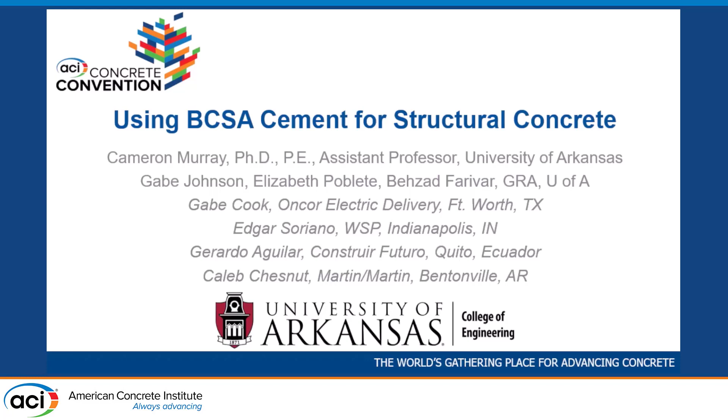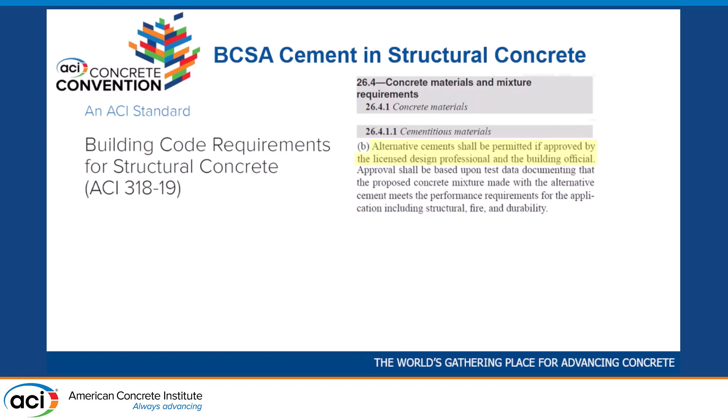I thought I would start with the ACI code, which governs how we design concrete structures. In the 2019 version of this code, there were a bunch of changes. One relevant to this session is that they added language about using alternative cements in structures. It says alternative cements shall be permitted if approved by the licensed design professional and the building official, with some wishy-washy language about exactly how you'd decide if the alternative cement is suitable for structures.

Fortunately, there's a good article published in Concrete International around the same time that's kind of a supplement to the code. It discusses specific factors for structures: axial strengths, compressive strengths, flexural strengths, shear and torsion, ultimate stress-strain relationships, volume change, and modulus of elasticity. It also covers fire and durability, but I'll focus on the structural stuff today.

In our lab at Arkansas, we've addressed several of these things, and I'll talk about some of that today.

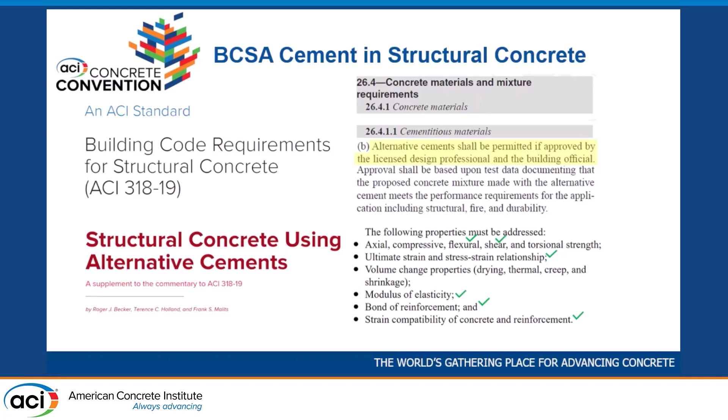This begs the question, why would we want to use this cement in a structure? I would never argue it should completely replace Portland cement, but there are certain applications where it may be a suitable replacement, like precast, pre-stress, and structural repairs, because those utilize its special properties like low shrinkage, fast setting, and fast strength gain.

But obviously there are a lot of practical questions around whether the properties are similar to Portland cement. My introduction to this was as a graduate student at the University of Oklahoma, where I was fortunate to help out with a couple of projects looking at pre-stressed concrete using BCSA cement.

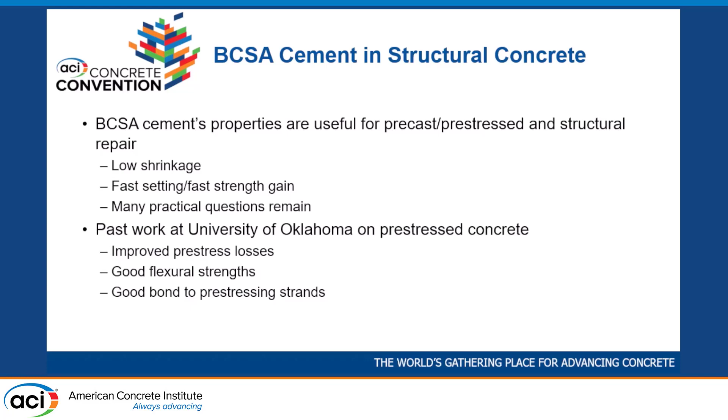On the left, we partnered with a local precaster and made structural-scale precast concrete elements pre-stressed with BCSA cement as a feasibility study. On the right, we did a lab study looking at bond between strand and concrete, and flexural strengths.

We found that the cement had improved pre-stress losses compared to Portland cement, primarily because of its low shrinkage, along with good flexural strengths and good bond with strands. This encouraged me to continue down this path of looking at this cement for structural applications.

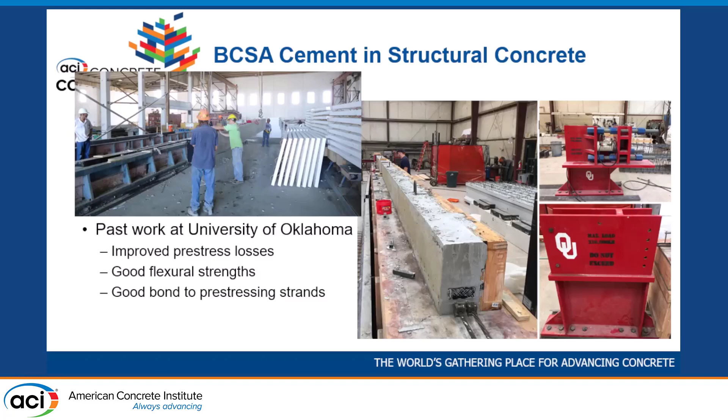From our work at Arkansas, I'll start with some practical mix design concerns. Mix design is obviously important for casting structural elements - we need mixes with the properties necessary to satisfy our structural requirements.

One big concern is setting time. At room temperature, the cement will set up in about 10 to 20 minutes with no retarder, so we generally always retard it. We've also found that temperature acts as an accelerator of setting time - at higher temperatures, the cement sets up more quickly.

We've done a bunch of setting time tests. This shows at 100 degree Fahrenheit ambient temperature, different water temperatures - 100, 75, and 40 degrees Fahrenheit - and a bunch of different water-cement ratios, what setting time you can expect. So if it's 100 degrees outside with 75 degree water temperature, we'd use about 0.5% citric acid by cement weight to get about 60 minutes of setting time.

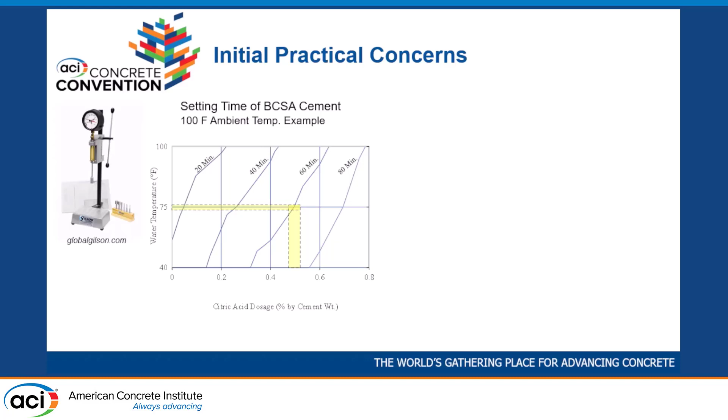Most of the time in our lab, at normal lab temperatures, we use about 0.35% citric acid, which gives us around 45 minutes of working time. So we try to work really quickly.

Another practical concern is slump. We need adequate slump to place concrete for a structural element - it's got to form around the rebar and all of that. For Portland cement, with a 1-inch nominal maximum size aggregate, we have a curve like this: if I use 325 pounds of water, I should get a 3-inch slump. This is the first step of mix design.

We did this kind of testing for BCSA cement. We find that with 0% citric acid, so no retarder, slumps are very low compared to Portland cement. Partly this is because with no citric acid, the slump retention really sucks - it starts to set up really quickly. Interestingly, if we add citric acid, it makes the mix a lot more fluid, so we get a big increase in slumps.

And if we continue adding citric acid, the slump increases even more. So this is kind of useful just for determining initial mix design parameters, getting the slumps that we require, and the setting time that we need.

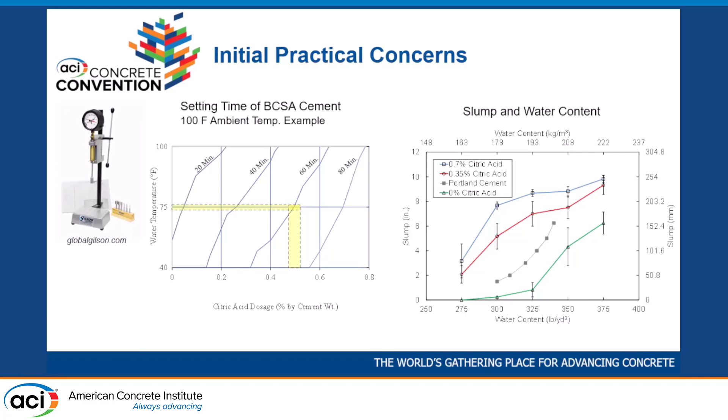Another thing we've looked at is just compressive strengths. That's obviously really important for structural design. So we've done a bunch of testing with different citric acid dosages, different water cement ratios. If we use 0.35% citric acid at room temperature, and a 0.4 water cement ratio, we can exceed 4,000 psi in 3 hours. That's generally what we're aiming for, because this maximizes the benefits of this cement, the really, really high early strength.

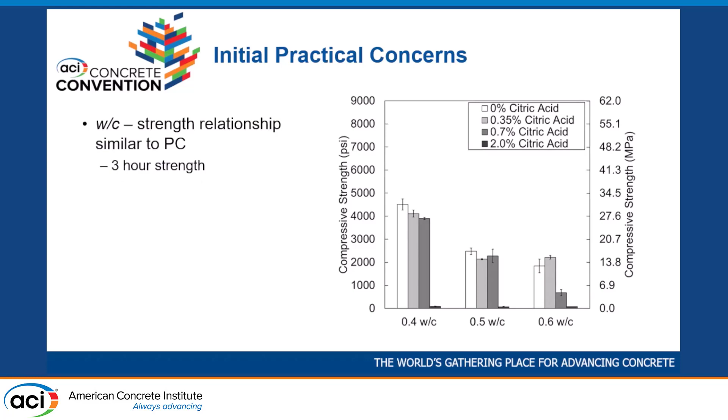And at 28 days, the strengths are very good. We had 2% citric acid here. The 3-hour strength is like 0, but the strengths are good at 28 days. So that's just kind of background.

I want to get into the structural applications now. So when I arrived at Arkansas, the first study we did was with a grad student named Gabe Cook. He made a bunch of reinforced concrete beams. They all looked like this. They were about 12 feet long, 6 inches wide, 12 inches deep.

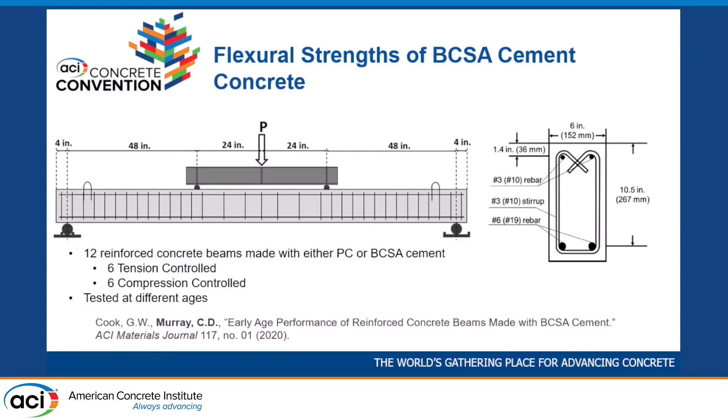We made some tension-controlled and compression-controlled specimens. I'll just show the tension-controlled specimens here. We made them with Portland cement and BCSA, and we tried to keep the mixtures very similar so that the properties would not be affected by mix design parameters.

The first thing we looked at when we tested these beams was just qualitatively, what does the cracking pattern look like? Are we seeing things that look like flexural failures? This is one of our Portland cement tension-controlled beams.

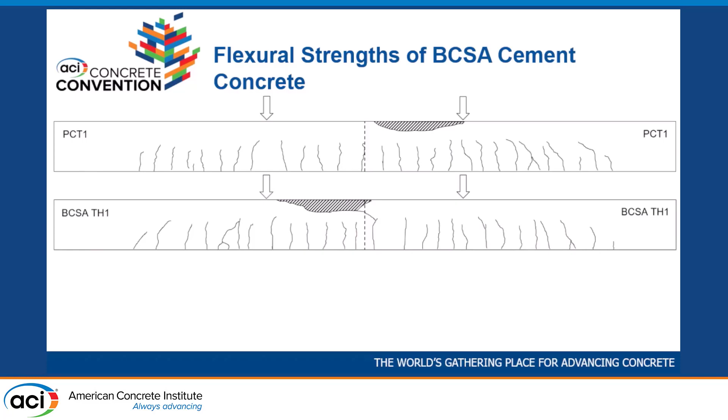This is a BCSA beam that we tested as soon as we could get it out of the forms and put into the load frame, about 4 to 5 hours after casting. You can see very similar behavior, distributed flexural cracking. The cracks are about the same height, similar number of cracks. That's all good in terms of the flexural performance.

And this was true when we tested our BCSA beams at 1 day of age as well. So the performance is just as good after they start gaining strength.

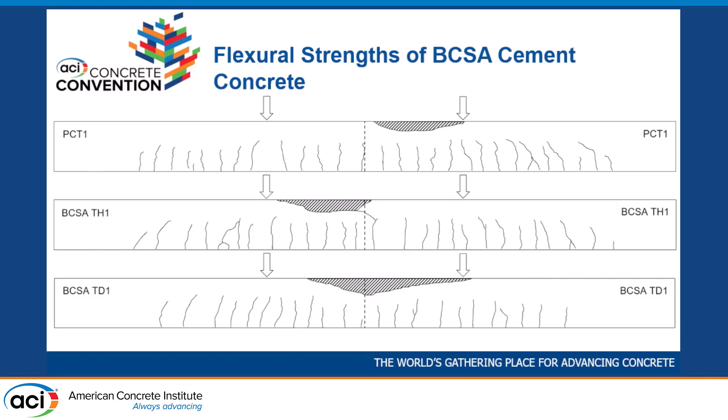We also look at load versus deflection. This is a good way of seeing if the performance of the beams is similar to Portland cement. So here's the Portland cement beams, and here's the BCSA beams that we tested at about 4 or 5 hours of age.

And you see they plot right on top of the Portland cement beams. Then these are the BCSA beams that were tested at a day of age. So the performance of all these was very similar. A couple places we really look at are where the cracking occurs down there at the bottom, where yielding occurs. It happens at similar loads and deflections, and then this ductility out here that's indicative of a good tension-controlled reinforced concrete failure. So it's very similar for Portland cement versus BCSA cement.

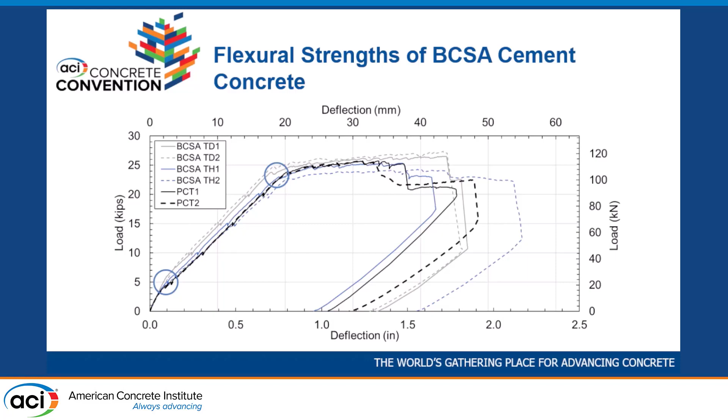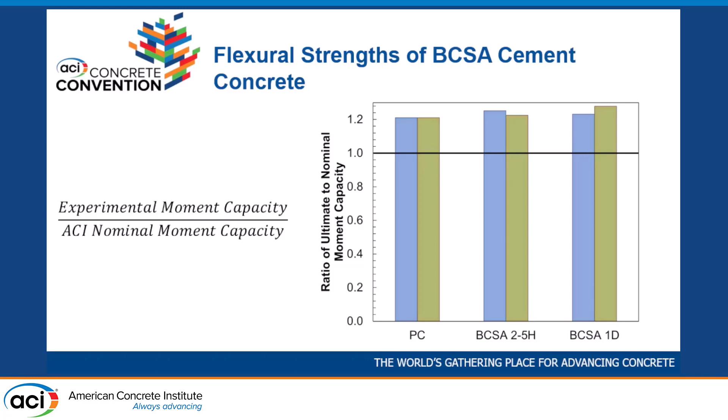So we also look at just moment capacity. We divided the experimental moment capacity by the nominal moment capacity, so greater than 1 is good. And they were all greater than 1. You can see this ratio is pretty similar for the BCSA beams as it was for Portland cement. So the code equations are just as conservative for BCSA as we would expect them to be for Portland.

Another kind of cool thing we found, we looked at this thing called the ductility index, which is if we take the deflection at ultimate load and divide it by the deflection at yield, we get a scalar value that tells us how ductile the beam was.

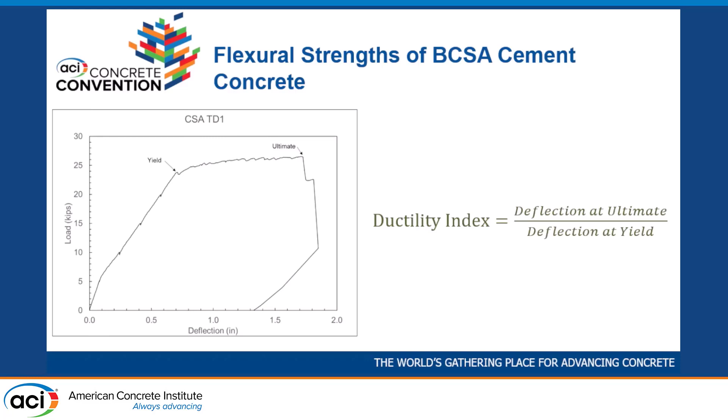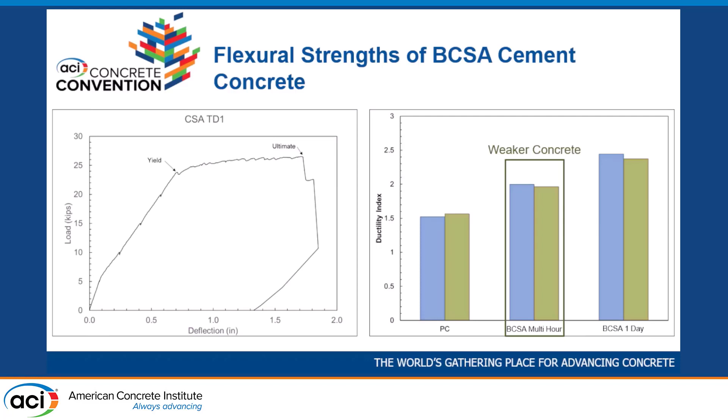And we found that the BCSA beams were more ductile than the Portland cement beams. And this improved over time, so they became more ductile after 1 day. It's kind of interesting because these were actually weaker concrete than the Portland cement beams. So in spite of it being weaker concrete, we had more ductility. The only way we could really think to explain this is maybe it had something to do with the ultimate compression strain in the BCSA cement being different from the Portland cement concrete. So this led us to want to investigate this further.

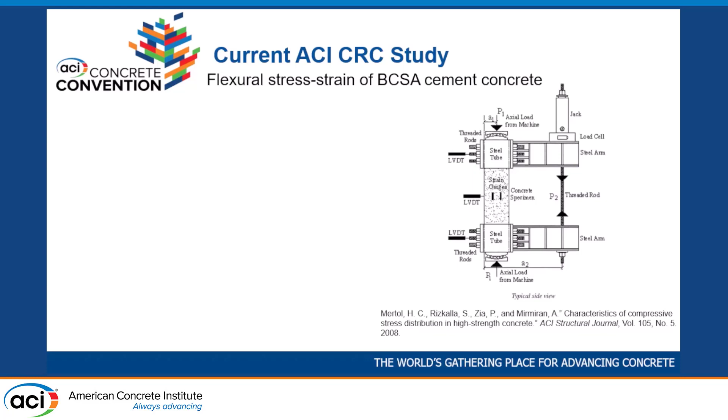The Alternative Cement Committee supported an application to a CRC research project, so we're happy to be working on that now. In this project, we're looking at the flexural stress strain characteristics of BCSA cement. We're emulating a test setup done at NC State University in the early 2000s, which itself emulated work going back to the 1930s when they developed the strength design methodology in the ACI code.

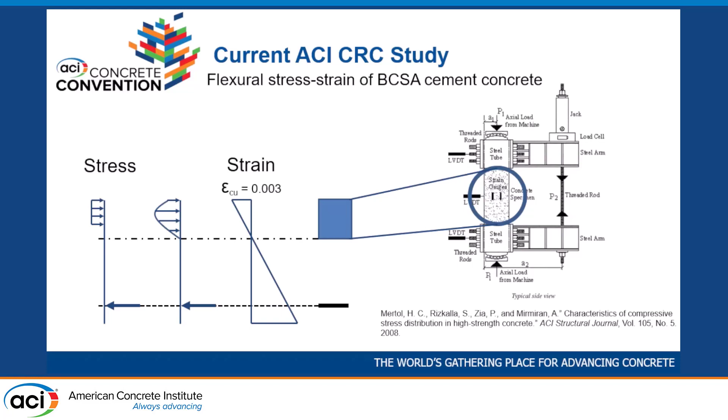The idea is we put a big axial load on the specimen and then apply a load here to put a moment in the concrete. This concrete portion represents the top part of our concrete stress strain diagram for a beam, the part that varies from 0 strain up to 0.003, the ultimate compression strain. We know the stress distribution looks something like this, and we estimate it with this model. So we're seeing if BCSA works the same way as Portland cement, if these parameters also work for BCSA cement. Here's what our setup looks like, and you can see it looks really similar.

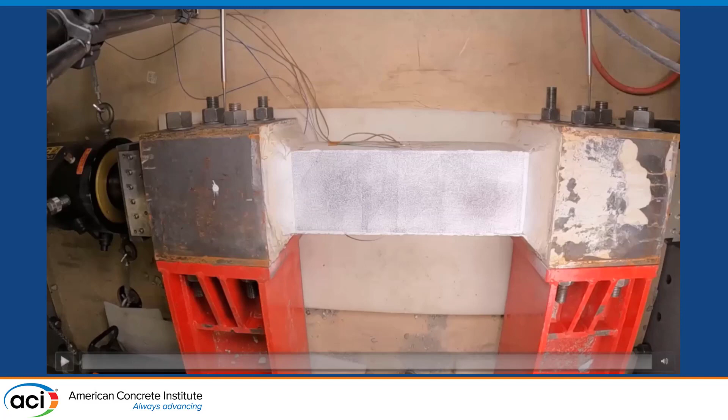So I got some cool videos, this is my favorite part. This is full speed. Okay, play. These are fun, this is why I like doing this stuff. Well, I say they're fun, they're kind of scary. I'll watch it again.

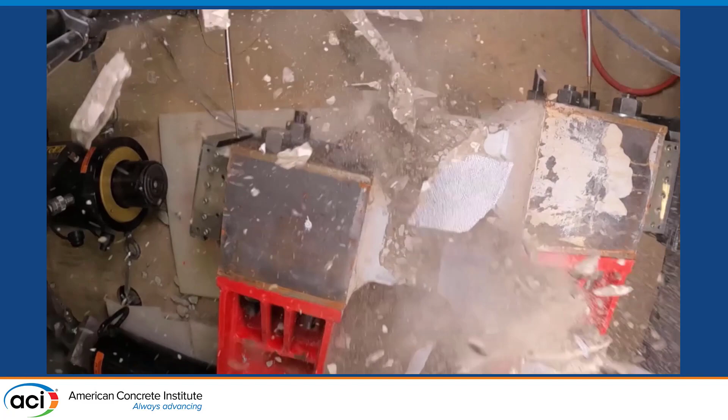So those are about 220,000 pounds of axial force. Here's a slow motion video. There are strain gauges at the top and bottom, and we have a digital image correlation system that measures the strains on the top surface there. Yeah, these are cool, I could watch these all day.

So that's kind of on the flexural strength side. That project is ongoing, I don't have any results to show from that yet. We hope to finish our testing in the next month or so, and our report is due in October, I believe. So shear is another thing we're interested in.

After we did the flexural strength study, I had another student work on some shear strength. So we made these beams, they have the same cross section as our flexural beams, 6 inches by 12 inches, but we put the load closer to the end. We used a shorter span, and there's no shear steel here, so we're just looking at the component of the shear that comes from the concrete alone.

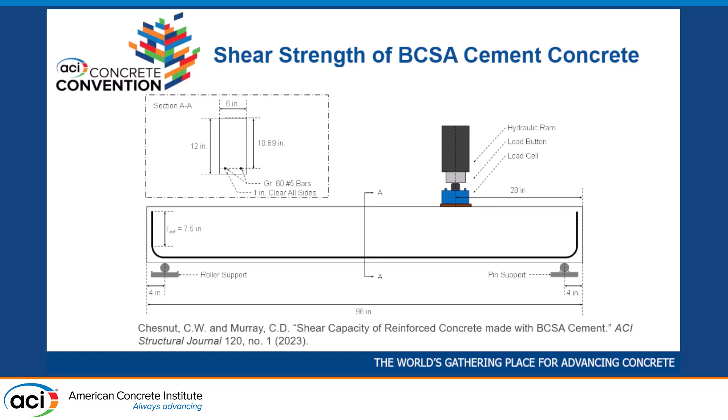First we look just qualitatively at crack patterns. This is one of the Portland cement beams, and here's one of the BCSA beams. You can see all our failures were characterized by a big shear crack that went more or less from the load point down to the support. They were all very similar.

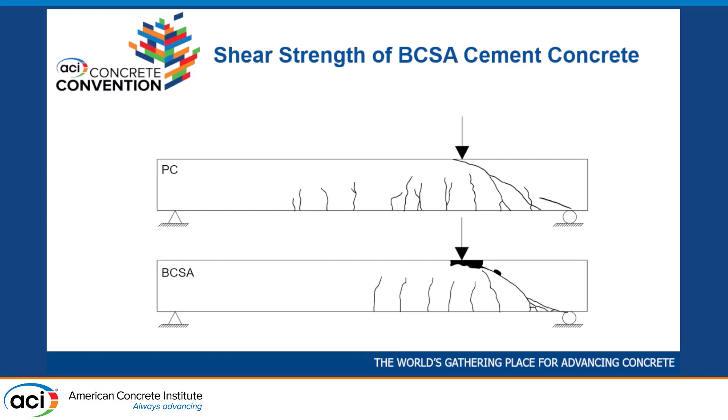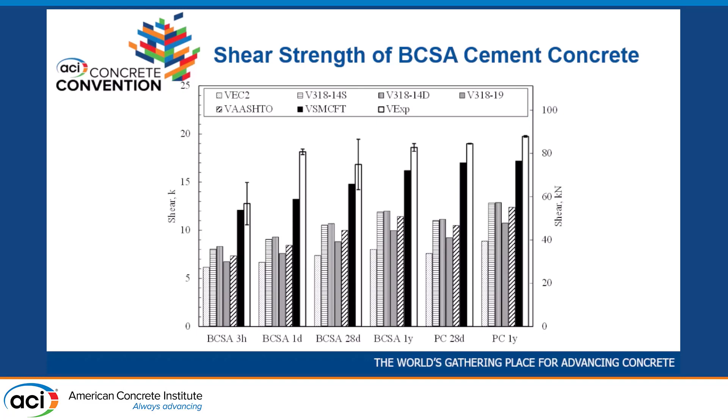So in conclusion, from the testing we've done in terms of flexural and shear strength, the code equations appear to be adequate for BCSA cement. We're getting similar results as we'd expect for Portland cement. We have ongoing work looking at stress strain for BCSA cement concrete, and Betty talked about her work looking at repairs with BCSA cement. I talked about some of the unique mix design considerations. I actually think that's a strength of BCSA cement compared to other alternative cement technologies, it's sort of like Portland cement, you can buy it in a bag, mix it with water, and it makes concrete. So it's a little simpler than some other alternative cements.